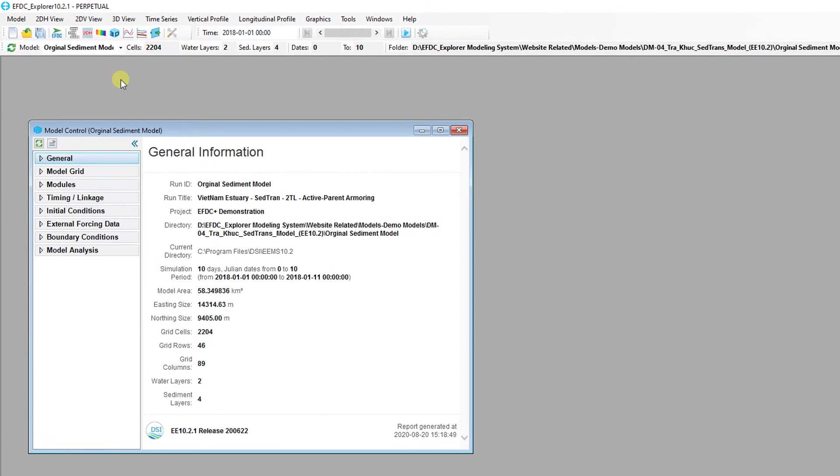Next, let's take a look at the 2D profile view in EFDC Explorer. There are two ways to open a 2D profile view window. The first one is on the main menu under the 2DV View menu, and a button can be found on the toolbar using the 2DV button. The data extraction dialog allows users to add many different parameters to the 2D profile view.

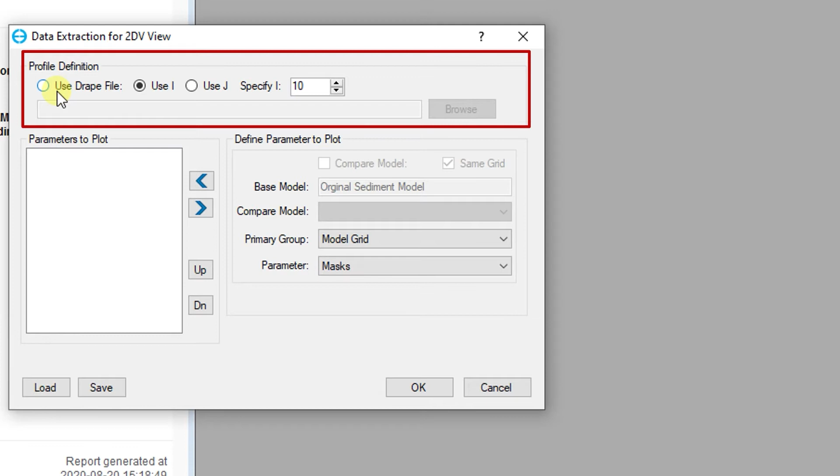Profiles are defined in one of three ways. The first way to extract profile data is to use a polyline or shapefile. Once the Use Drape File radio button is selected, the user must provide a path to a compatible polyline or shapefile. The user can also use a single I or J index value to extract data.

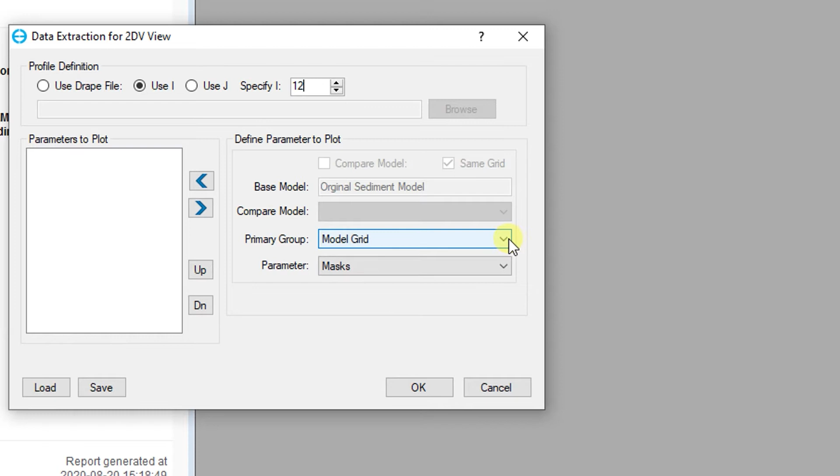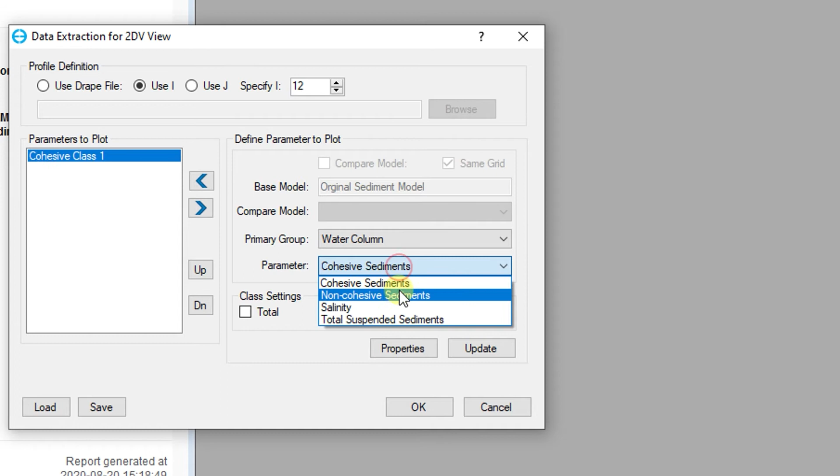The Define Parameter to Plot frame requires the user to select which parameters will be displayed. To filter the list of parameters, the user first selects a primary group, and then selects a parameter from the list below. Once the desired parameter has been located and selected in the parameter list, use the left arrow to move the parameter to the list of parameters to plot. Parameters can be removed from this list using the right arrow.

Multiple parameters can be plotted simultaneously, and the draw order can be modified using the up and down arrow buttons. The Update button will replace the currently highlighted parameter in the Parameters to Plot frame with the currently selected parameter in the Define Parameter to Plot frame.

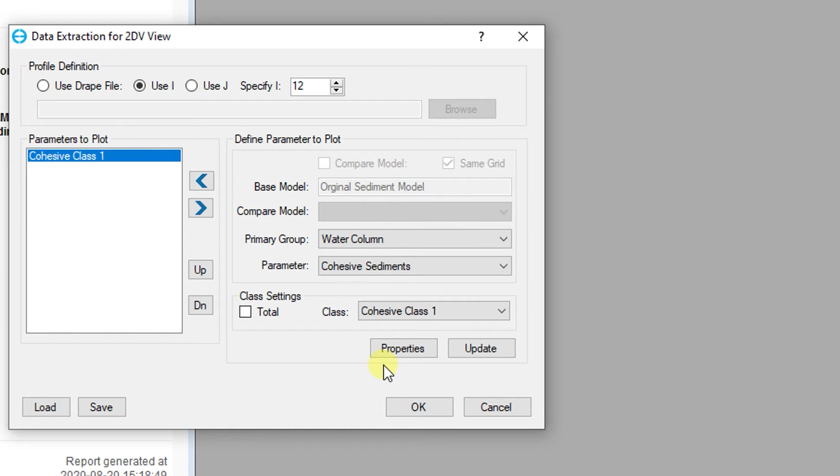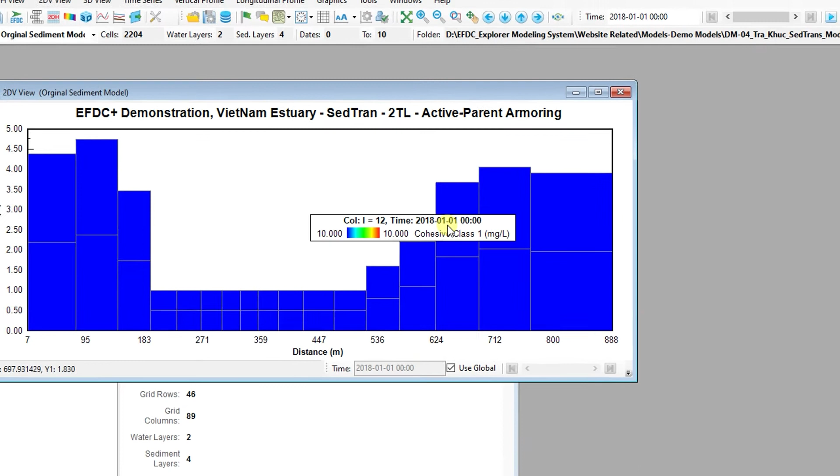The Properties button will open the 2D Profile View properties. From here, the user can configure the color ramp, contour, precision, range, and other settings. Once the 2D profile view is open, toolbar shortcuts appear in the top bar and in the 2DV View menu.

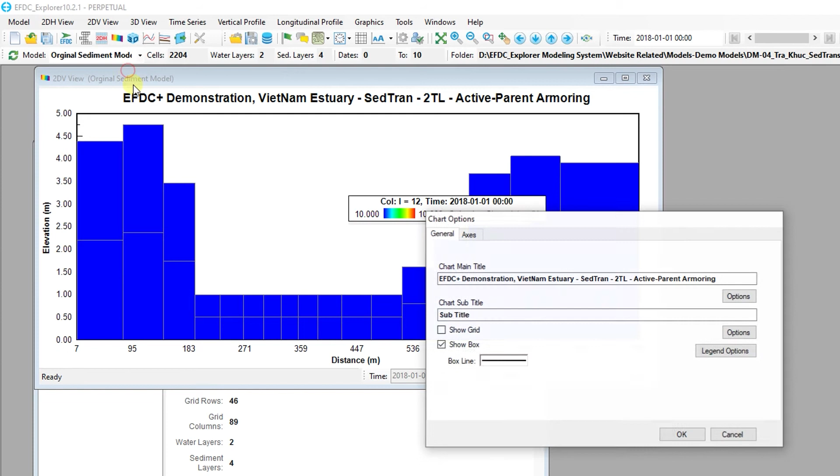The chart options allow the user to change the font, box line, and contents of the title. Here you can change the appearance of the legend and change the font, contents, position, and scaling of the axes. In the marker settings, the user can create horizontal or vertical markers along the X or Y axis of the profile view.

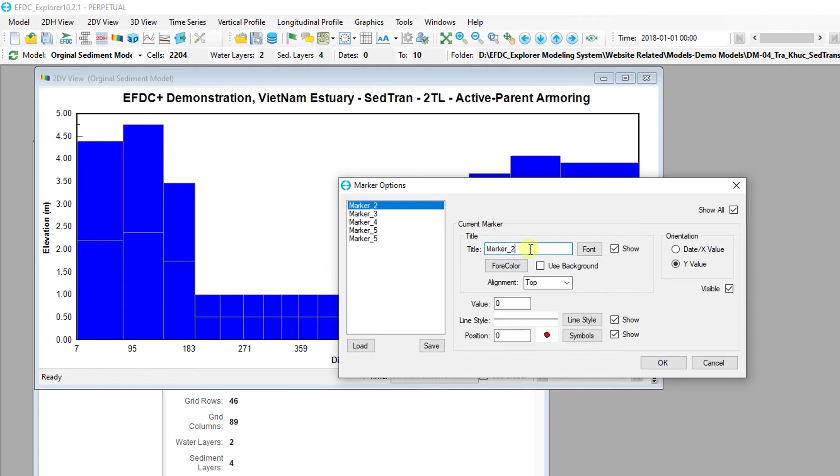Markers can be added and deleted by clicking the right mouse button in the box. The marker label can be customized in the title frame. The orientation of the marker and label can be selected. Finally, the position and symbology of the line or symbol can be adjusted at the bottom of the current marker frame.

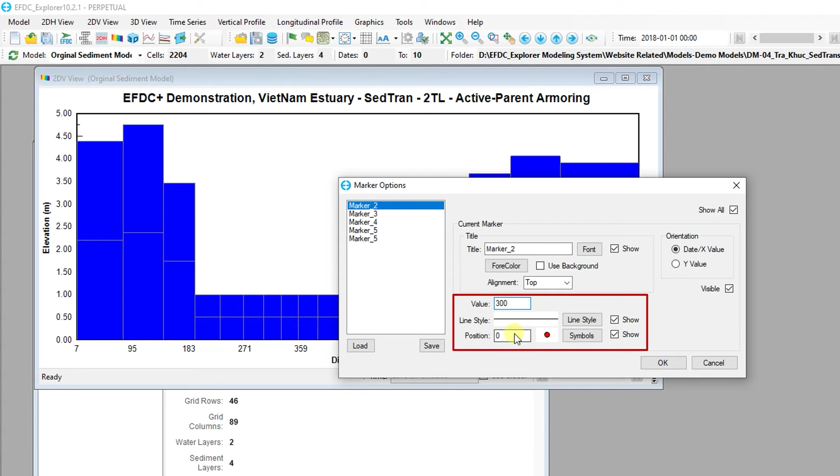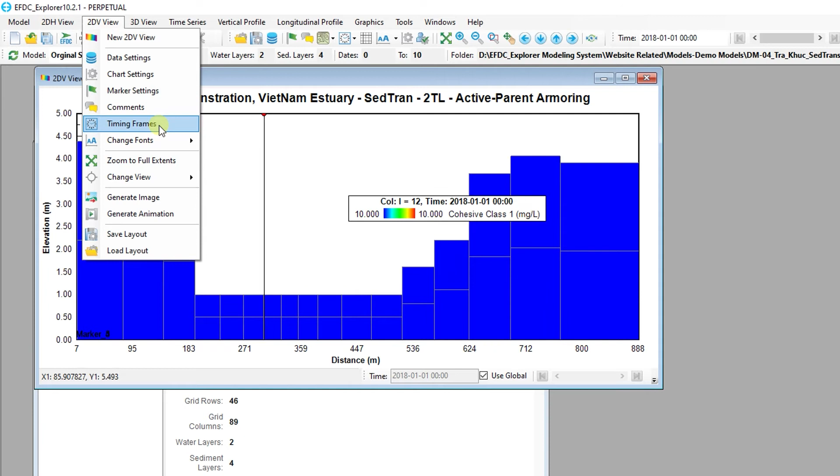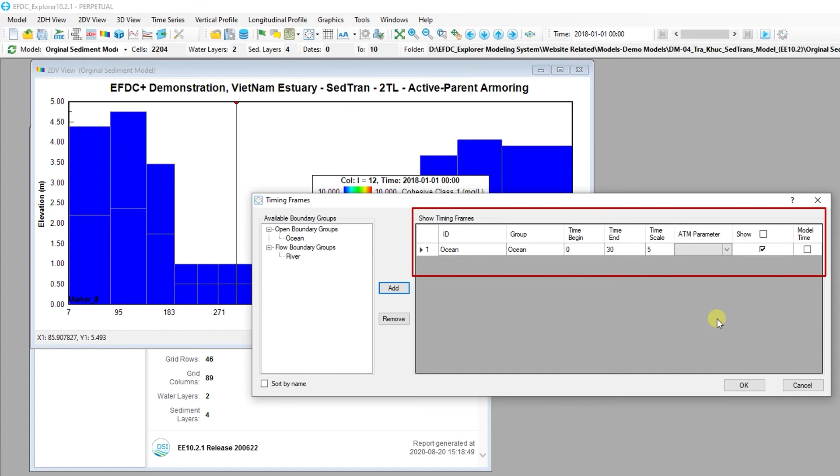The timing frames allow the user to display simple plots of boundary conditions, such as flow magnitude or wind speed and direction. The available boundary groups are shown in the Available Boundary Groups frame. Timing frames currently included in the profile view are shown in the list on the right. Once the timing frames have been configured, click OK.

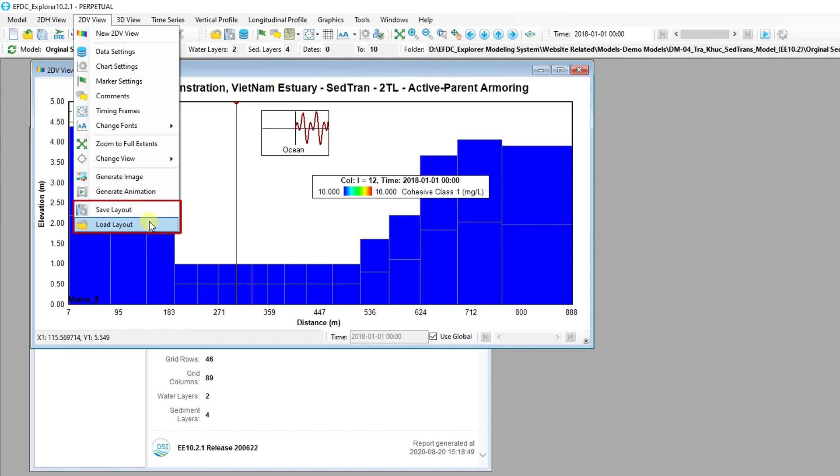Images and animations can be exported from EFDC Explorer into a variety of formats. As with the 2D plan view, the user can save and load layouts from previously configured 2D profile view windows.

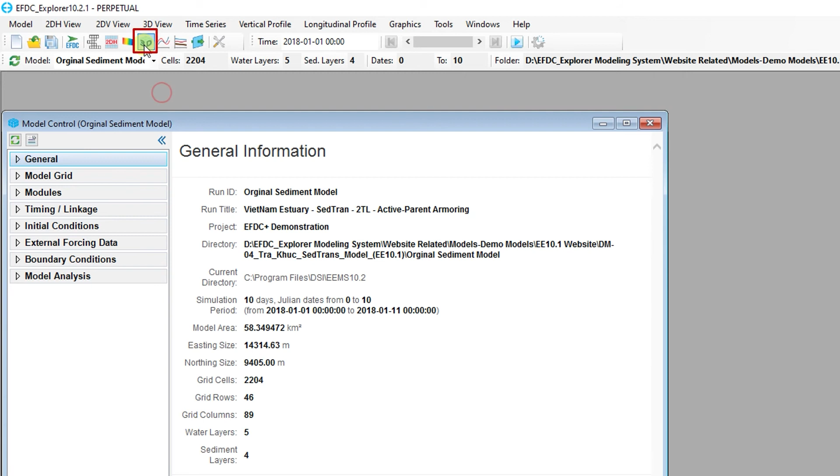EFDC Explorer also has powerful features for creating 3D visualizations and animations. Let's have a look. There are two ways to access the 3D view: through the drop-down menu and button on the toolbar. Much like the 2D plan and profile windows, the user controls the layers being displayed using the layer control. The 3D view currently supports visualizations of the water surface, water column, and bottom elevations.

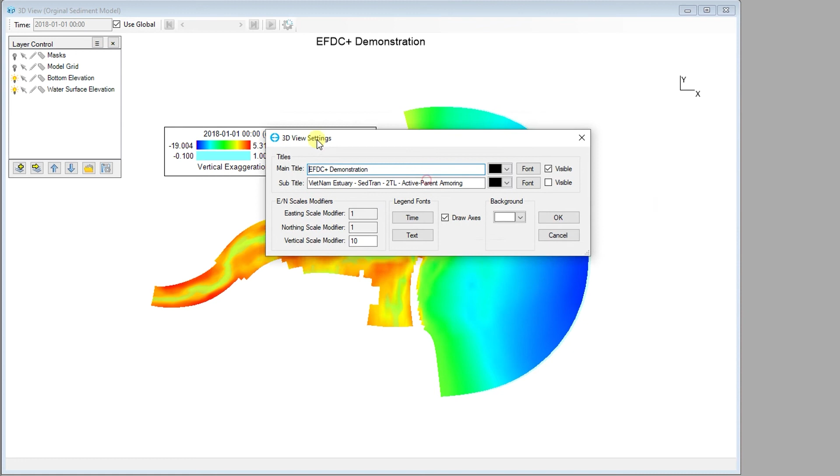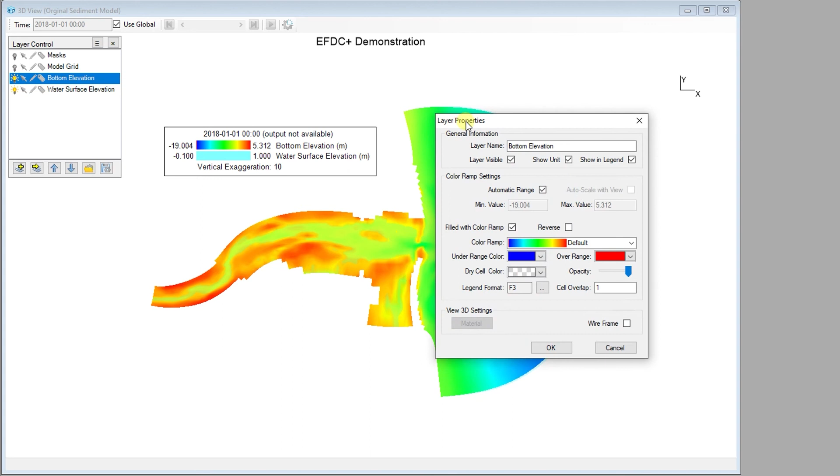The settings for the 3D view can be modified in the interface. The title and subtitle text and style can be edited. The scale modifiers, including the vertical exaggeration, can be modified as well. As with the 2D plan view, the user can right-click on any layer to open the layer properties. The user can modify the name and visibility of the layer, units, and legend entry for the layer.

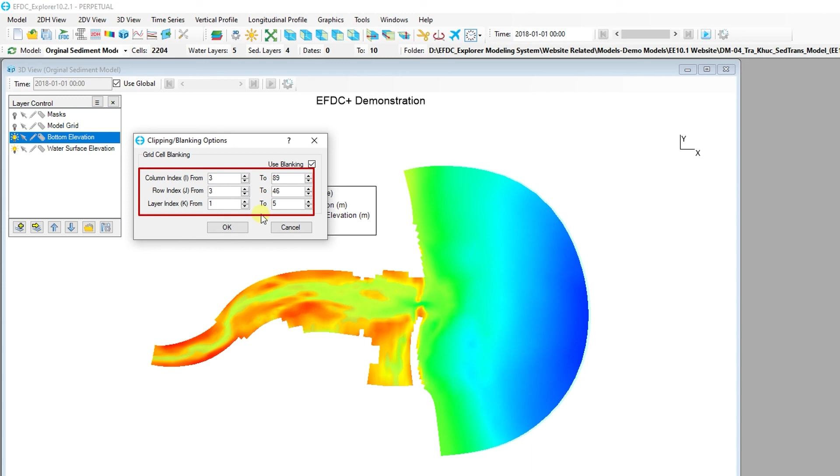The user can modify the range of values displayed for a layer, the color ramp, and various other settings to control the appearance of a layer in the 3D view. Clipping and blanking options allow the user to customize the display of layers in the 3D view. Grid cell blanking provides options to limit the drawing of cells to those within a defined range of I, J, or K index values on the grid. Animations in the 3D view can also include blanking, rotation, and movement of the camera along a predefined flight path.